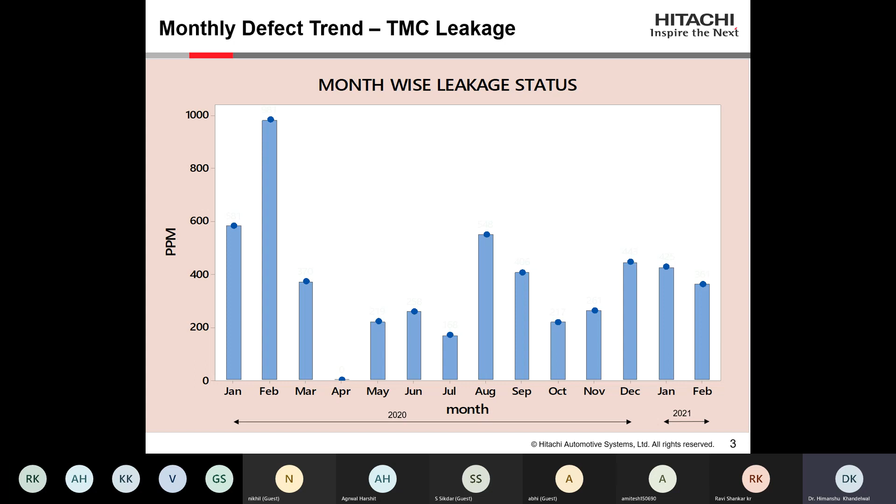Let me first show you the first slide as to why we have taken this project. This is the month-wise leakage status for 14 months. You can see the ppm level leakages that are there. They are fluctuating, not very stable or not very downwards trending. So we have taken this leakage project so that we can reduce the leakage to 0.

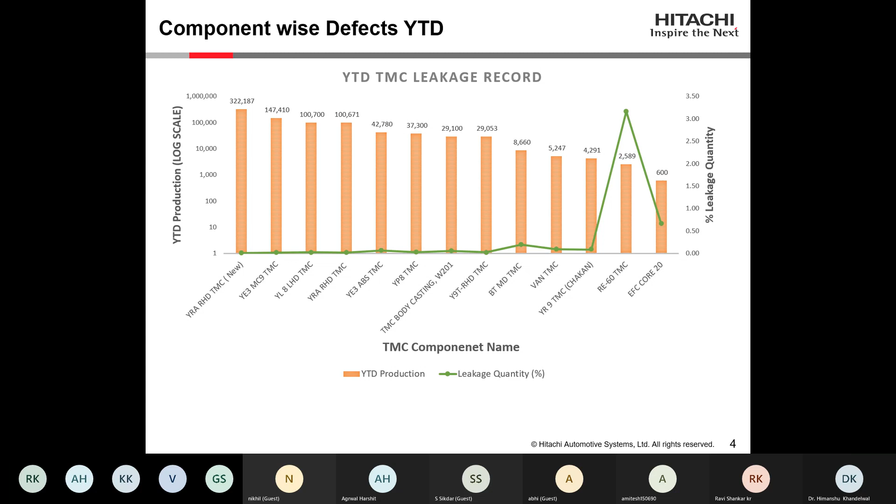This is the component-wise trend of what are the components that are showing the maximum leakages. This is the analysis, and this is the way ahead that we are going to do. DOE has been done. ANOVA we have to do after the compilation of the results of the trials. The trials have been taken. The further processing is being done, and I think in 4 to 5 days, I'll be able to compile the data, and then we can analyze it. That's all from my side.

Hello. Yeah. So I just wanted to know how you have decided this range of the 4 variables which you have taken. These ranges, sir, we have decided on the tolerance band that we use now in the real-time manufacturing process. We were not able to get the point of what are the combinations of the factors in which the defect is being generated. So we thought of segregating them into 3 levels and then deciding the project. So these are all under the tolerance only, but extremely low, middle, and extremely high.

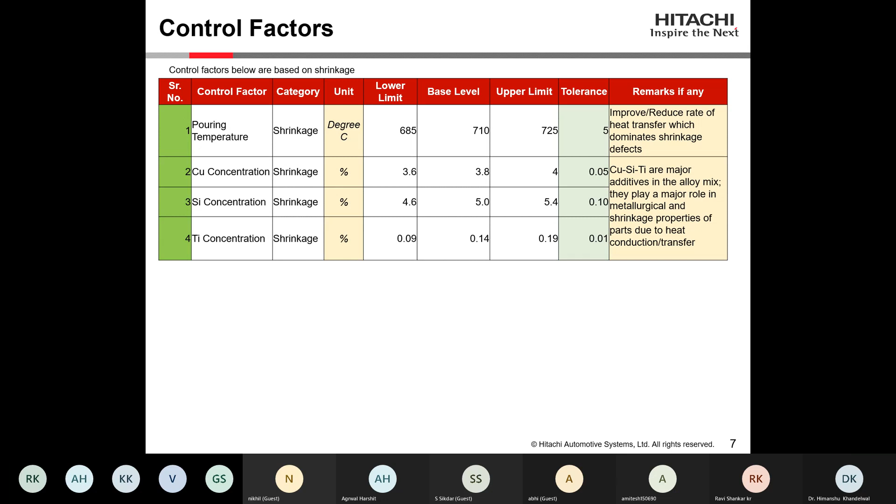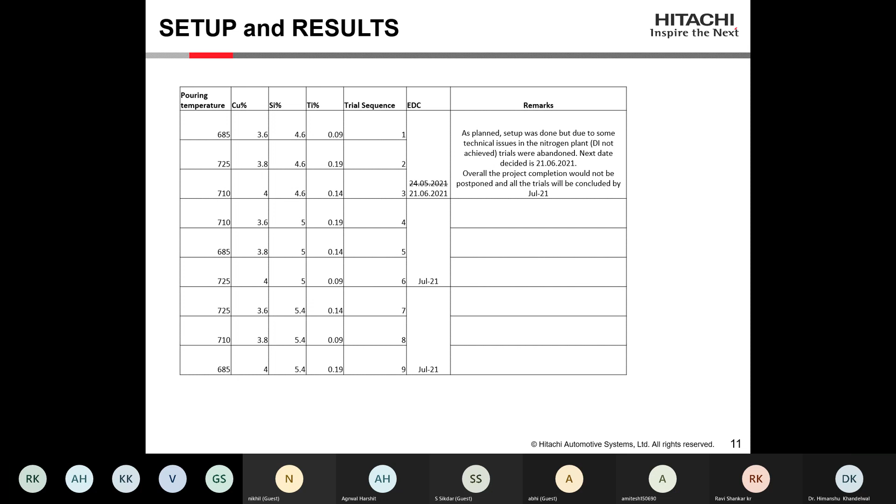And how many of them will be for copper concentration effect? How many of them will involve silicon concentration? And titanium concentration? Just show the details, it will be more clear, I think. One second. It's not getting opened. Actually, the data sheet is not getting opened. I'll tell you verbally.

Total 9 trials are there, and in each trial we have a certain level of pouring temperature, certain copper, certain silicon, and certain titanium. For each trial there are 160 castings, and those 160 castings will have the same parameters for pouring temperature, copper, silicon, and titanium. So we'll get a good amount for analyzing each and every trial, and then we can compare each trial with each other.

I think you should make it in a tabular form, so that the picture will be clear in front of us. In the next presentation, please do that. Yes, sir, no problem. And last time we also asked that in one, two or three slides you should write the contribution of each member. Have you done that? I will mention that, sir. Actually, I was not there in the meeting last time. That means you did not get that information. No, sir. Okay.

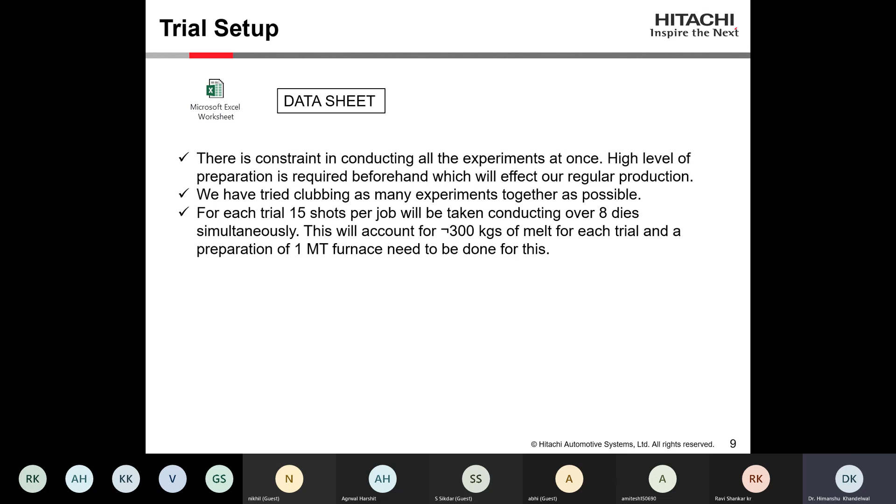Once you have the data, correct, as Abhishek is saying. In line with that, the other partner can take up whatever analytics he has learned here and implement it there. Maybe some sort of predictive modeling, or some prescriptive modeling, so that you will not get the defect you are getting. That thing you can try. Correct, Abhishek? Yes, sir, I'll do that. You have to do this actually.

So in a day or two, I'll make all the changes the faculties have suggested and get back to you. Okay. Thank you so much, sir. So next, maybe Nikhil, you can take over.

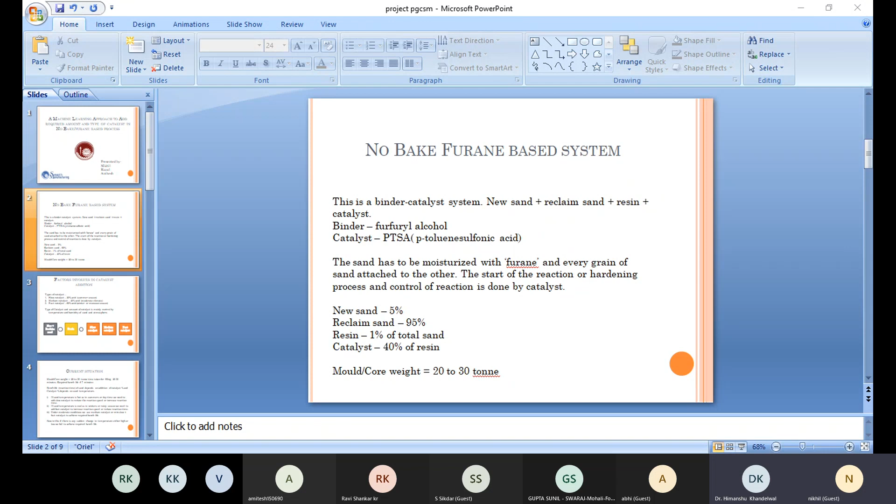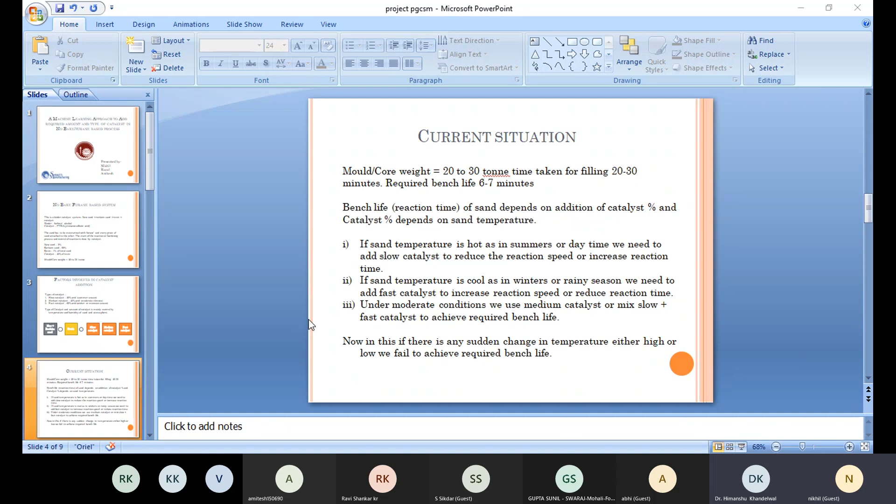Your slides are not changing. We are on the second slide right now. No, sir, I am on the fourth slide. No, it's the second slide, not moving. You have still not shared it. Put it in slideshow. Sir, is it coming now? No, you need to share the other file. You have shared maybe the one which is open. Maybe you need to close sharing and share the file which is in presentation mode. Okay, I will change it. So you do it manually here.

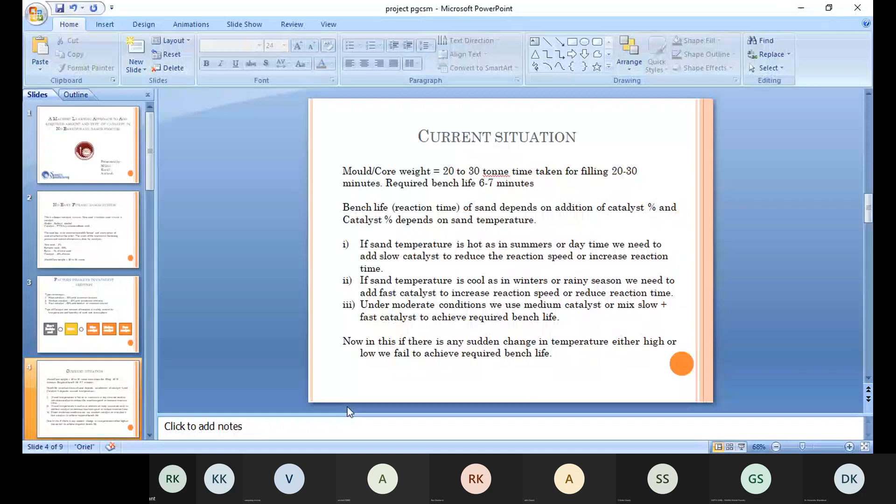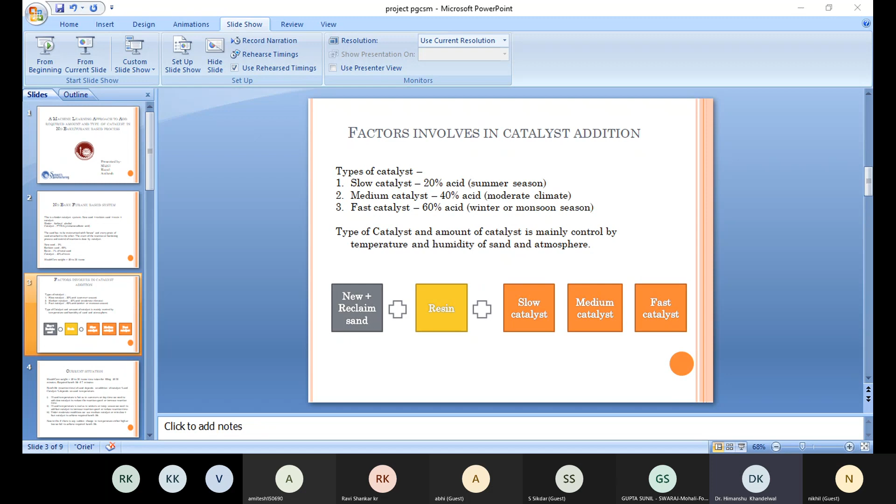So is it visible now? Hello. Sir, visible, but it's not in presentation mode. Now is it visible? It's visible, but not in presentation mode. Okay, make it presentation mode so that fonts will look bigger. I'm trying to do it, but I don't know why it's not showing to you. Just stop sharing, first put it in presentation mode, and when you go for sharing you will see two icons: one is the presentation which is open, and second is in presentation mode. That you can do if you want, or continue from here. Yes, sir. Done. Now it's visible.

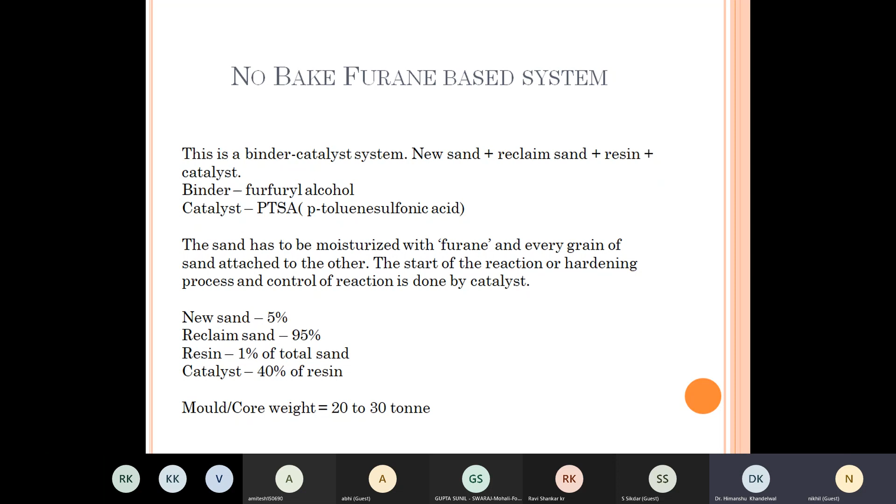Okay. So we were at this second slide, where I told you about the new sand percentage, reclaimed sand percentage, resin percentage, and catalyst percentage, and a basic overview of our furan-based system and mold core weights. Here are new sand plus resin, new sand plus reclaimed sand added with resin, and then slow catalyst, medium catalyst, fast catalyst. These are the three types of catalyst we are using.

So what I want to say is, when our temperature increases, we need to use slow catalyst. But when temperature decreases or humidity increases, we need to use fast catalyst. Sometimes we use slow plus fast, or medium plus fast. Basically we are managing the acid percentage, because these three types of catalyst differ only in acid percentage, which depends upon temperature and humidity.

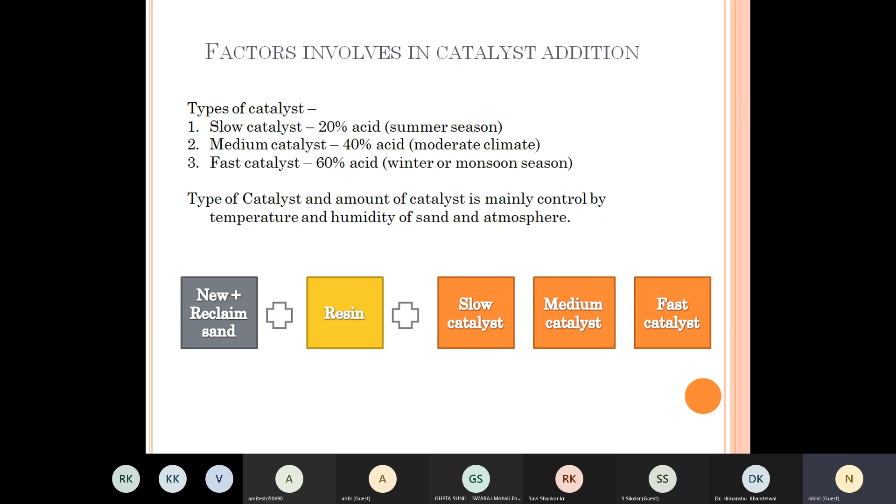For that, we have collected data from the past 1.5 years on how, with temperature and humidity, the catalyst percentage is changing, how much bench life we are getting, and the type of catalyst. This is our current situation. If sand temperature is hot, as in summers or daytime, we need to add slow catalyst to reduce reaction speed or increase reaction time. But at night it can change, and we need to go from slow catalyst to medium catalyst.

So how do you measure this bench life time? We have a stopwatch and a sampling system. Can you explain? We take a sample from the mixer and put it in a place, and start the stopwatch. When the reaction starts, it solidifies on the surface first, the surface in contact with the atmosphere. At that time we come to know the bench life.

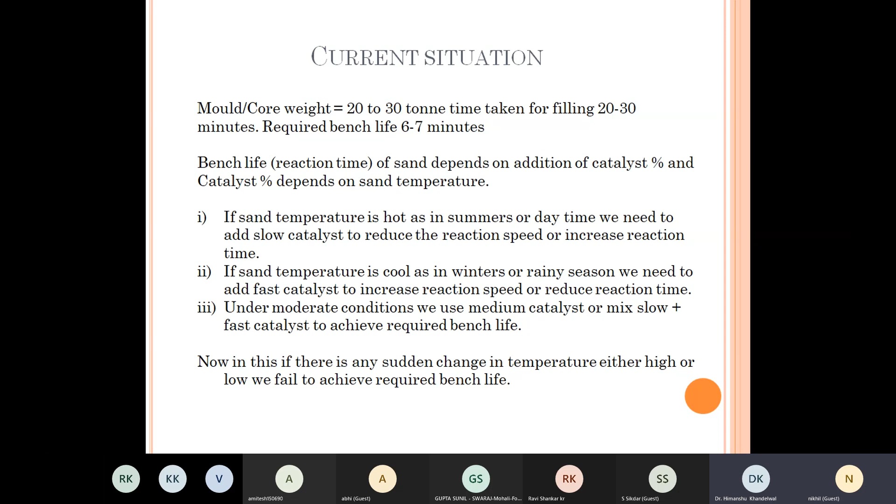What is the lead time for preparing one mold box? Sir, when the box comes, it takes almost 1.5 hours from preparation to mold making to shifting it to the stripping station. There are 8-9 stations, like molding station, curing station, stripping station. So lead time is 1.5 hours to 2 hours, depending on the mold size.

So, sir, our variables. Now we'll focus on my variables and what we have to lock. Atmosphere temperature, that is varying from 26 degrees Celsius to 42 degrees Celsius. Humidity 35 to 80%. Sand temperature 30 to 38 degrees Celsius, because we have a gate locking system after 38 degrees Celsius. Sand will not pass if it is more than that. Type of catalyst: slow, medium, fast. Catalyst percentage we are managing with 30 to 40% of resin addition.

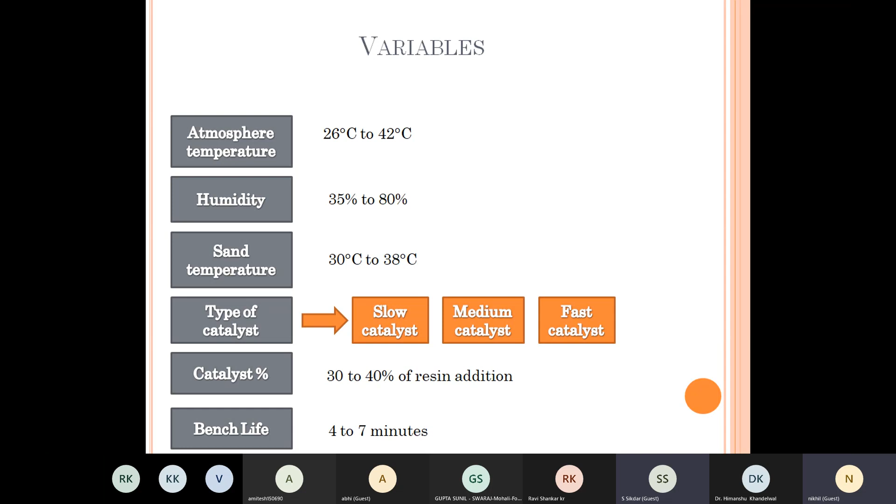Bench life, now we are getting 4 to 7 minutes, less or more than that. So now our whole idea is to build a system on the basis of previous study and data that decides how much acid is required. We are not locking the catalyst, we are dealing here with the acid percentage, which we want to maintain. So our inputs will be humidity.

Can you go back to your previous slide? Yes, sir. This one? No, next one. Objective of study. Yes, this, sir. Yeah, just wait. So, how do you provide this suitable bench life?

So see, what is my whole idea behind this, what I thought before putting this project. Now we have a resin barrel, a Sintex tank, and a single catalyst Sintex. We are supplying to the mixer from the resin Sintex and from the catalyst Sintex. Either we put slow in that Sintex tank, or medium, or fast. That depends, as I told you earlier, on the bench life. According to the bench life we are getting, we add the catalyst.

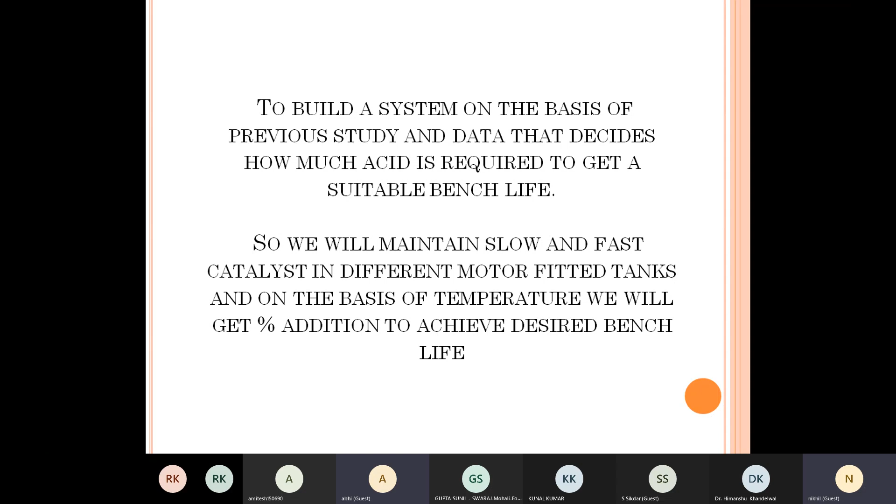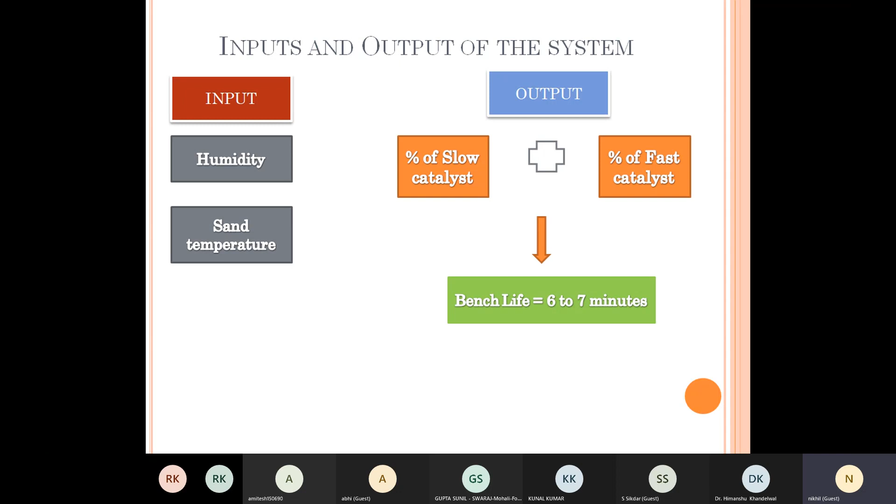Yes, sir. So our input will be humidity and sand temperature. Output, what we require is percentage of slow catalyst, percentage of fast catalyst, and that too with our bench life of 6 to 7 minutes. This is some of the data which we have, which we get, which we are using. Just some of the data it is.

So here we have this AFS number fines of this. These are the sand parameters: AFS number fines, LOI. Then comes our sand temperature, humidity, catalyst percentage. What I have done here is I converted catalyst percentage and acid percentage to a number. I combined them because finally I need acid percentage, how much acid is going.

So catalyst percentage is 30, so acid percentage is 40. Means 40% of acid we have used at that time. So that thing, and also bench.

So what will be the volume of data in total? How much data you are going to take? So there are 780 values. 780 values, and for a period of like, what, 1 year data? Sir, 1.5 year. 1.5 year data. Yes, sir.

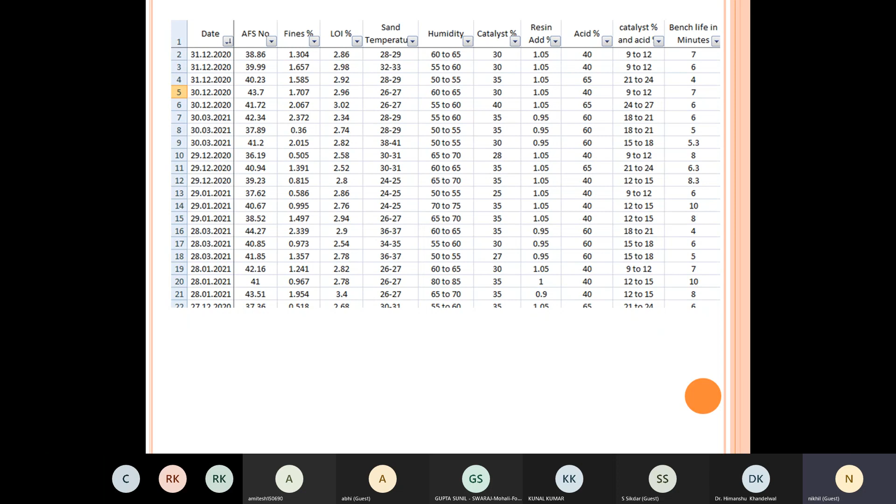Just give us an idea what kind of formulation you are going to have, so that we can give some suggestion on that. So for this we are going to use this Anaconda model, and that is going to be taken care of by Amitesh. So I think he can explain more to you. Is Amitesh available? So what's his contribution, that also you need to tell, no?

So he's working in your company only, or he's in some different organization? Amitesh is in a different organization, sir. So Amitesh is going to do the analytics part, correct? Yeah, you can say that he's going to do that part. I will be guiding him.

So another member will do? So he has done data mapping. Yeah, Kunal Kumar and Amitesh both are doing this data mapping and analytics part. I'm just guiding them on what factors they have to consider, what is the whole idea of the project, what we have to deliver, what factors we should take care of. Okay.